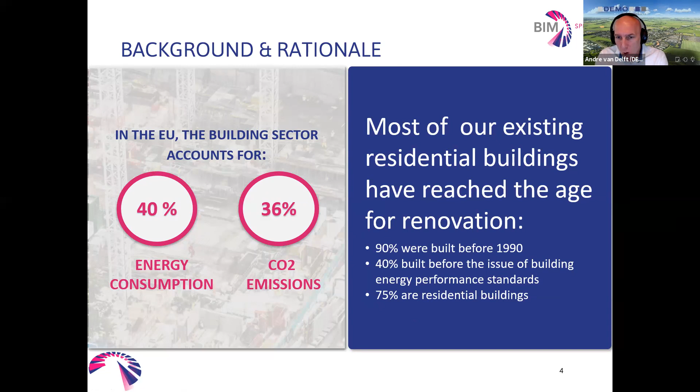And on top of that, 75% of the buildings are residential. So it is quite a challenge when you also realize that the renovation speed in general in Europe is between 1 or 2%. That would mean that renovating the entire stock would cost minimal 50 years and maximum 100 years. So that really is a long time to improve the buildings, and we badly need to do so, as we are all aware of.

So the objectives that we have set ourselves in the BIM-Speed project are firstly to enable all stakeholders to adopt BIM, to reduce the time of deep renovation projects by 30%. So that 50 to 100 years could really be sped up by this, and that's the first objective.

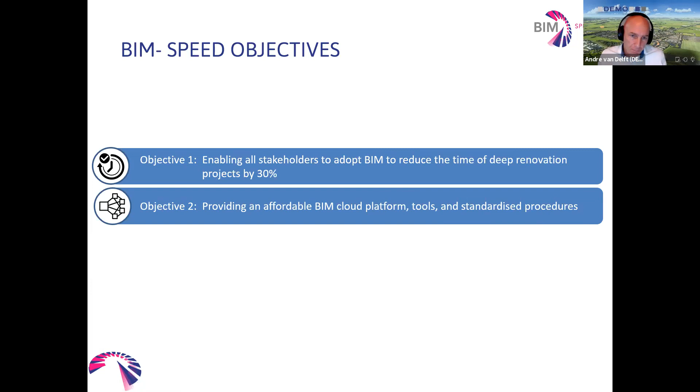The second one, in order to enable those stakeholders, we will provide, or we have provided already, an affordable BIM cloud platform, tools and standardized procedures. And last but not least, we want to create and implement renovation solutions with a guaranteed energy performance, because we can provide a platform, etc., but if there's no solution available that could be implemented, it would not achieve a result at all either, of course.

So these three objectives are integrated, you could say, in our vision, and the vision is again to develop and implement and provide this BIM-Speed platform. So a harmonized building information speedway for energy efficient renovation. And it is not so much only a platform with some dedicated tools, but we really want to create an ecosystem, not thinking and developing everything in advance.

Of course, there have to be tools developed in advance in order to use and make a valuable ecosystem, but we really are aiming for an open ecosystem, so that other suppliers, tool suppliers, can also link and provide their services and tools in this ecosystem. And in that sense, you could compare it with a real highway.

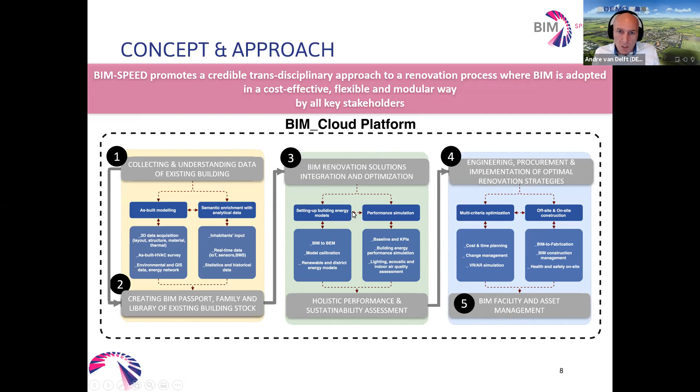You could wonder, well, is this useful for me? And what is it exactly about BIM? Well, BIM appears in many, many ways, and it can be used in many, many ways. So we made an inventory in this project as well about the possible use cases.

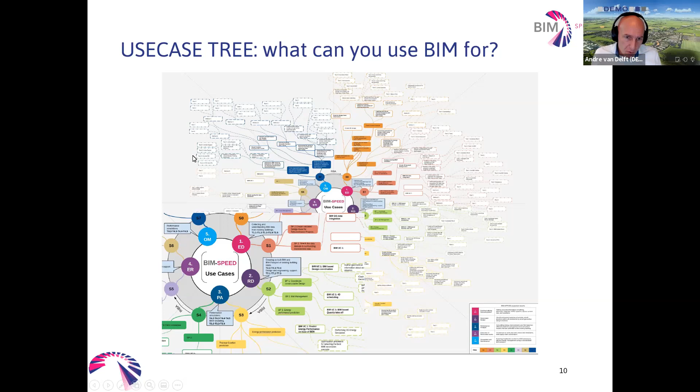And there's also a tool made available by the BIM-Speed project in order for yourself to assess: Is it valuable? Is there something that you could use it for? When there is this use case that could be applicable for you, then you could wonder, well, am I mature enough? Am I capable to drive on this highway, to use those tools?

There we have made a distinction about the BIM maturity for your company. So you can assess by using an online survey if your company, if your employees are already capable of using it in a fruitful way. And based on that, there will be some general suggestions to adjust your BIM readiness, so to improve your organization.

But at the same time, if your organization is ready for it, we still have to check if the particular project is ready to be used. Is it really helped by using BIM? So there is also a project questionnaire, the use cases, as I mentioned, and as well on this side, some suggestions to make it more mature.

And all in all, this is provided to really make it applicable and to make sure that you're getting the best out of it. If it is just in the old-fashioned way or really high-tech, it all can be used all together on the same platform.

When we think about really low-level entrance and really sophisticated systems, we have to make sure that different parties, different tools using the same highway can really cooperate with each other. So a lot of effort is put into the interoperability of all those tools, such as the industry foundation class and gbXML, mainly open standards, in order to make sure this ecosystem works with all those different tools, different users from different suppliers.

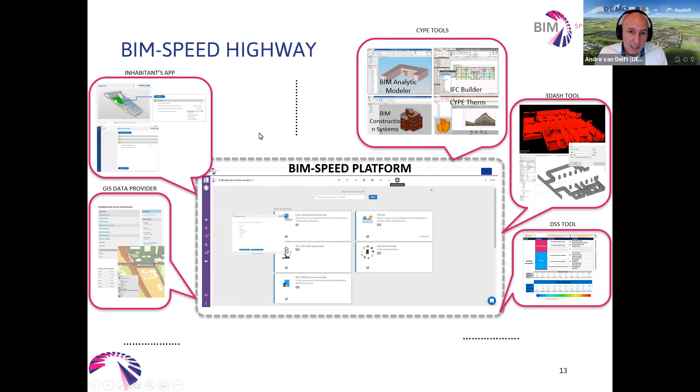For example, an app that can be used by inhabitants to collect all kinds of data valuable for deciding what kind of design we should come up with. Also GIS data provision of, let's say, climate data in order to make good energy analysis. All kinds of tools later explained in the session, like a decision support tool and a 3Dash tool. Just some examples, but again it will be explained more in detail later on.

And we are testing the possibilities of those tools, those protocols, on those demonstration cases. Not all functionalities are tested on every demonstration case, but we've made a nice distribution where, for example, we check in one demonstration case how we can acquire the as-built data and do the BIM modeling, while in others there's emphasis on the renovation design, or the building energy modeling and performance simulations, or the renovation execution, so offsite and onsite construction, and of course post-renovation evaluation and long-term maintenance planning. So all these functionalities, all these tools, are somehow being validated in these demonstration cases.

To conclude this general introduction of BIMSpeed, it is a 48-month project funded by the European Commission. At this moment we are almost at 75%, so we have milestones, 8 chunks of 6 months. At this moment we've more or less completed and validated the methods for renovation design and analysis, and we're about to enter the last year where the BIMSpeed competition is organized. That will also be explained by Spiridan this morning, and we really want to apply it all the way on those demonstration cases.

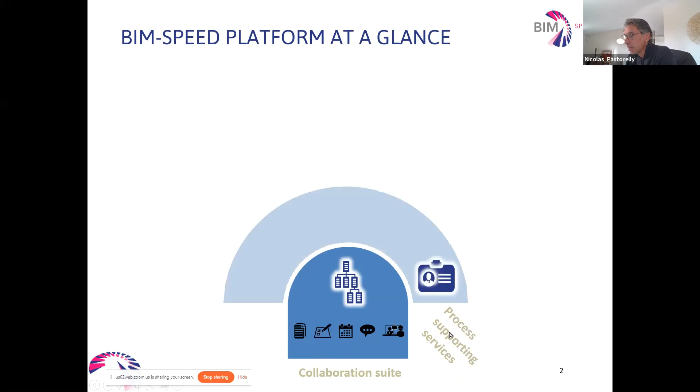On top of that, once you are manipulating files, you have some extra services like process supporting services. So you have a central authentication system, which is used by several of the services that are integrated.

You have a store of services where we can plug in the different services that you will be able to access through the platform. We also have a folder wizard, which makes it possible for you to create in your project some wizard according to specific folder organizations, and also to have some automation, like checking files or having specific content instantiated inside your project.

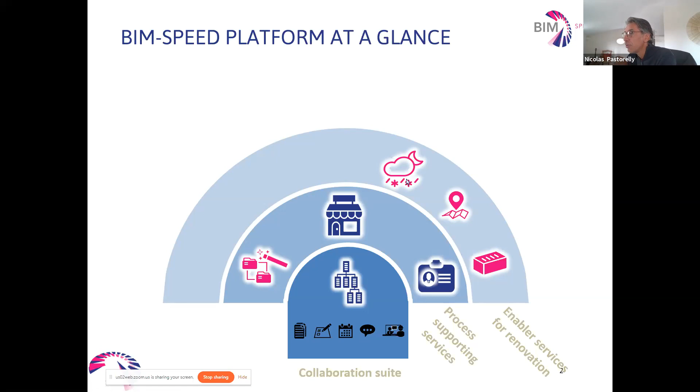On top of that, we have some enabler services for renovations which were created. We have a material service, which takes material data into the IFC and prepares it for simulation. We have a GIS service, for instance, where you can retrieve data around the location of your renovation site, as well as weather data, a system to retrieve all the data required to perform analysis and simulations before performing the renovation.

On top of that, you have all the BimSpeed partner services, several of which will be presented later in this presentation. You have the entire CYPE ecosystem. You have services which make it possible to get connected to IoT platforms and retrieve live information from sensors, some services which convert point clouds to BIM to IFC files and simulation tools, and things like that. Technically, all these tools are connected through a generic API, which is why we can have all these services and integrate more and more of them.

And we also have a competition. I will say a few words about that, but it will be described later again in this presentation.

I have to let you know that this platform, the BimSpeed platform, is actually built on top of the Kroqi platform, which is a French state-backed platform. It was created by the French state to help SMEs go to BIM and use BIM. BimSpeed is actually a superset of this platform, meaning that you need to create a Kroqi account and convert it to a BimSpeed account so that you can have all the services related to BimSpeed.

So let's talk now about the core services which are proposed by the collaboration suite. When you create an account, these are the services that you can use to conduct your project. First of all, you have a document management system where you can manage users and give rights on the folders to every user you want to involve in your project.

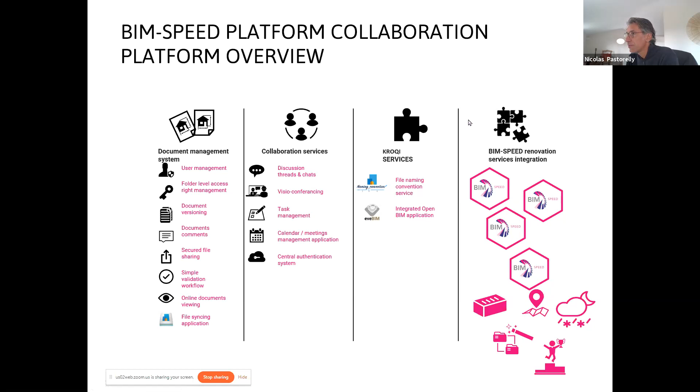All these services will be presented to you later, and you can find them, of course, on the Bimspeed website to have a concrete list of this.

Just a few words about the process of enrollment, and especially enrollment in the competition. If you want to use this platform, first of all, you need to create a KROQI user account. So you need to go to kroqi.fr, provide a login, provide a password that you can choose, and then create a personal account for a specific user.

Once you are there, you can create several workspaces. Usually people create a workspace with the name of a company, so mycompany.kroqi.fr or whatever you want. And once you are connected, logged in with your user account, and you are creating a workspace, you can create several projects, and on every project you can invite users.

So you invite people to create a login on the platform and to join a project, and you can share a document with them. At that point here, you are still inside the Kroqi platform.

And if you want to convert it very easily to the Bimspeed platform, actually what you can do is enroll in the Bimspeed competition. I will show you that later. You have a small service which makes it possible for you to enroll in a competition. And then once you enroll in a competition, your KROQI account is converted into a Bimspeed account.

So it means that you have a free plan for a competition. I mean, you can invite anyone, and you can store as many documents as you want. You have a Bimspeed branding of the application. It's not KROQI anymore, it's Bimspeed.

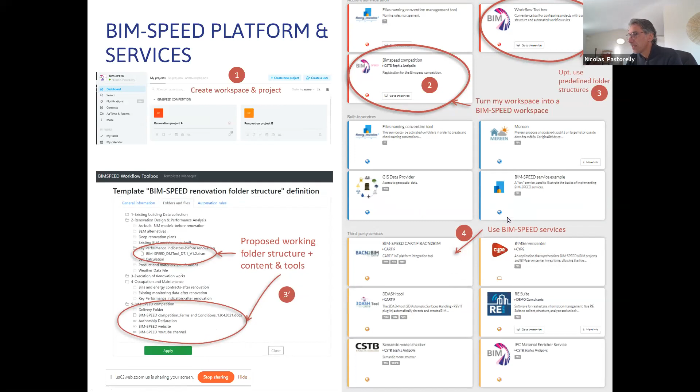Final word, our goal here is to break the monopoly of the construction industry, so you don't need to use a solution from one vendor. The vision of the platform is that we have several producers, several kinds of tools that will be presented to you. You are the consumers, and in the middle you can use the BIMSpeed platform to use several of these partner applications, all coordinated through the folders or through the platform to help you perform renovation.

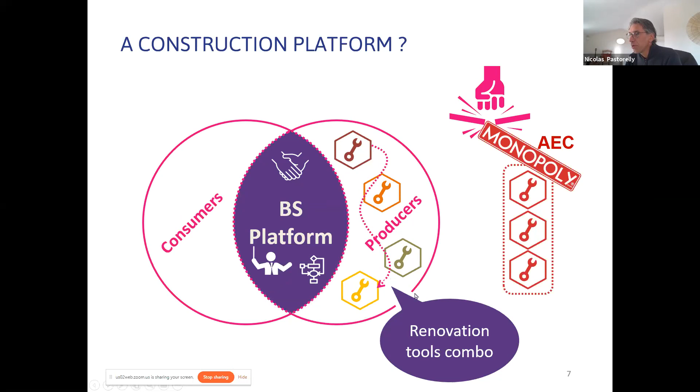And that's the toolbox, the combo which is proposed by the BIMSpeed platform. Okay, I'm done on my side. I hope it's good time-wise, and I will be available later for any questions.

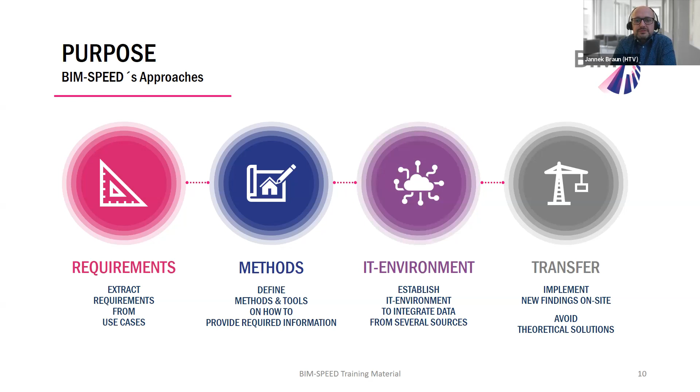Finally, as Andre mentioned earlier, we try to transfer the findings to on-site projects using 12 demonstration projects spread all over Europe. But what is the development, or how did we develop the BIM-Speed project?

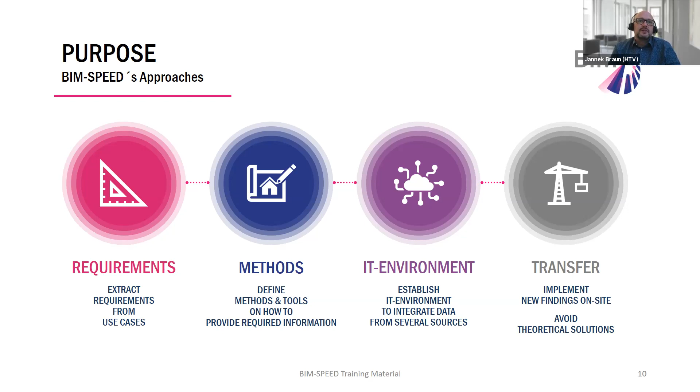Starting from the main objective, which I'll give in brief on the next page, we identify the relevant BIM use cases, and from those we can derive the requirements, or the data which has to be collected, to fulfill the use cases and therefore the main objectives.

So the four main objectives of the BIM-Speed project, as mentioned earlier, are to increase energy performance, to reduce costs, to speed up the whole refurbishment process, and to increase inhabitants' comfort.

When we started, we found it's a big issue to talk about use cases, because everybody has their own idea of what a use case is, but we found it most important to speak with the same tongue. So we created the use case terminology for our BIM-Speed project.

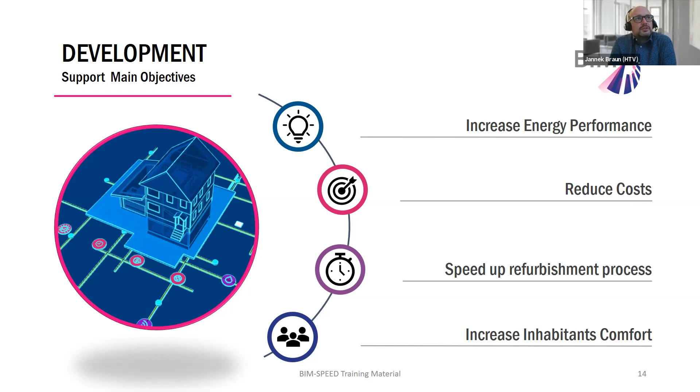To explain some buzzwords briefly: the renovation goal is the overall objective we would like to achieve, for example reducing energy consumption. The business processes are those processes done to reach those goals anyway, whether you use BIM or not - that's not important for that.

So the business processes are what we all do in our daily business when it comes to construction and refurbishment projects. The BIM use cases are use cases which support those renovation processes by using BIM models to get better and more exact results, supporting those business processes. Finally, the methods are the way of working to serve the BIM use cases.

So it's more specific when it comes to a specific software or service we are using. Bringing all this information together, the whole BIM-Speed consortium created a huge table with all the information, and I'll zoom into the headline to talk about it.

On the left-hand side you see the renovation goals which we would like to support: energy consumption, time reduction, cost reduction, and inhabitants' comfort.

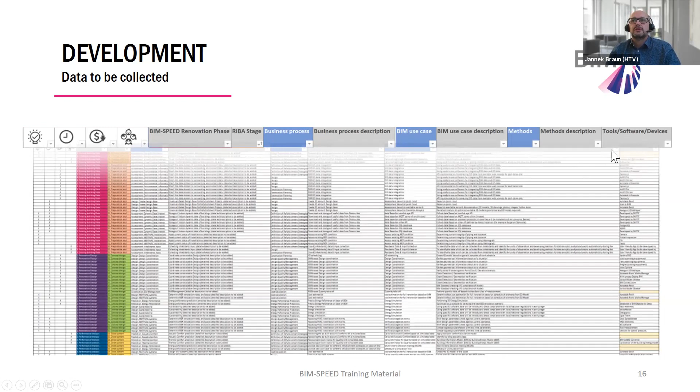So we're talking about a top-down approach where we define which goals we would like to achieve and go through the whole Excel spreadsheet to see which tools, software, and devices we can use to collect the information and support the specific BIM use cases.

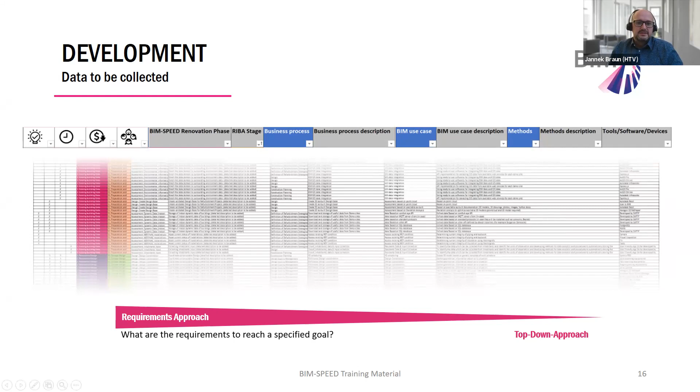So these are a lot of words. Maybe it's easier to just provide a short introduction, or a short overview, if I give an example of the BIM-Speed methodology toolkit.

As I mentioned before, the BIM-Speed methodology toolkit is an Excel spreadsheet meant to be used by anybody, and it's more or less self-explaining because we have a step-by-step introduction. All those buttons you see here are the filter sections we can go through.

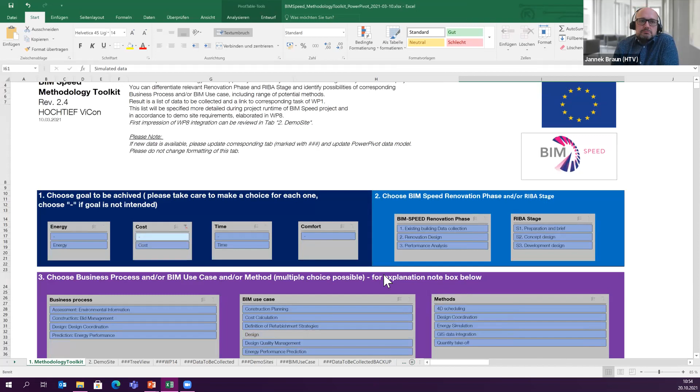So we choose for this example that we would like to reduce the costs, and we go for - in this example - okay, this is very good right at the moment.

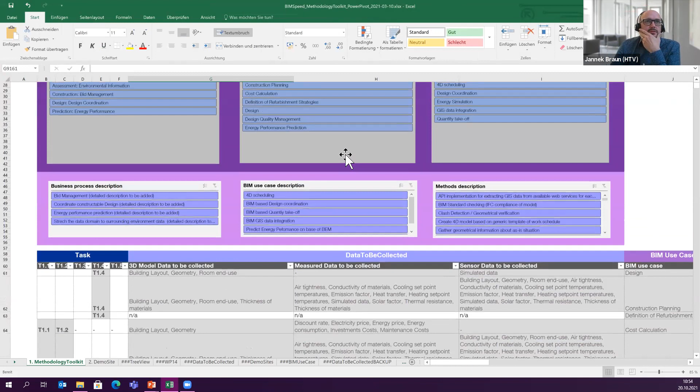Okay, and then you have the possibility to set, okay, we would like to go for the BIM use case construction planning. You will get more information on what is meant by the use case description, and finally it will be filtered down.

So as an excuse, this is not a problem of the spreadsheet of the BIM-Speed methodology toolkit, it's a problem with our docking station right at the moment. I'm very sorry for that.

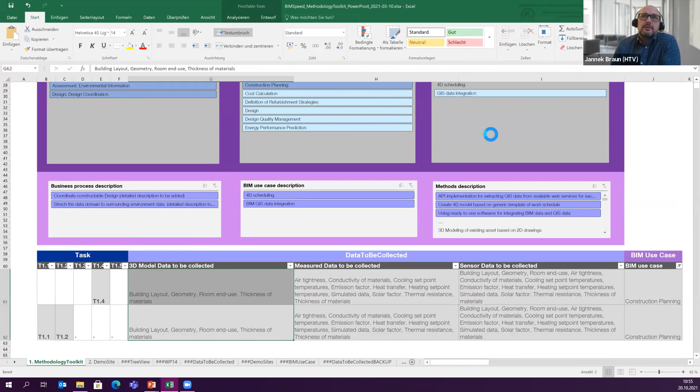But hopefully you see, okay, I have to set some filters, and finally I see which data needs to be collected on site. So on one hand, we have the 3D model data to be collected, which is just to set up the 3D model.

Measured data to be collected, which can be measured directly on site, and data which will be collected via sensors, which should be more or less automatically collected.

And finally, and that's the last step, is an overview. We see all the demonstration projects down here, and we also have the possibility to go for construction planning and see, okay, we would like to create a 4D model based on the generic template, and you will see on which demo sites this will be demonstrated.

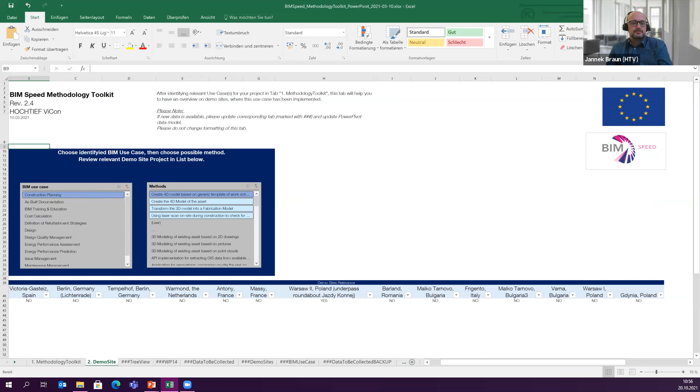To transfer the findings onto operational systems. And this ends my little struggling presentation, and hopefully I provided nevertheless a good overview about the BIM-Speed methodology toolkit and how we intend to identify which information has to be collected for specific BIM use cases. That's it from my side.

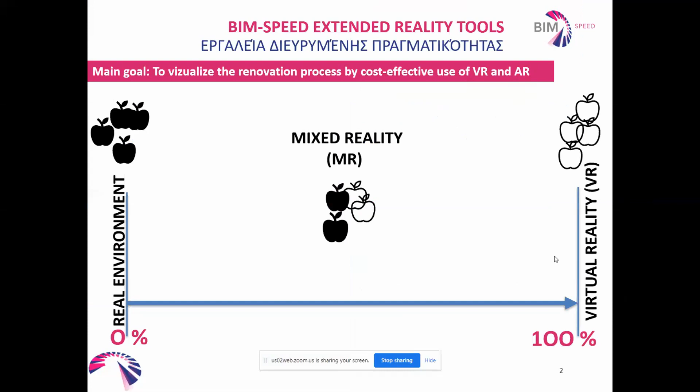You see the illustration that I created, 3 apples real and 1 unreal. I think this all is clear.

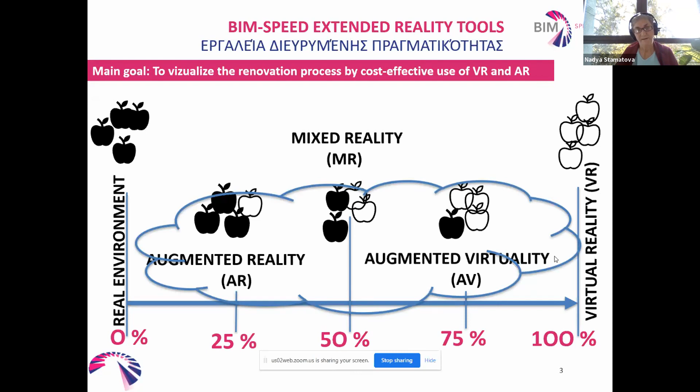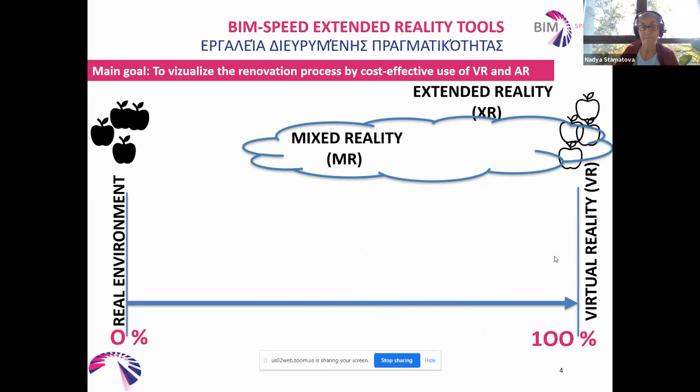What's extended reality? It's an umbrella term covering mixed reality and virtual reality. This is the full picture.

Before preparing the application, each one application, you should have an idea what you show. So you should write a scenario of the application, and it's a part of the game design document.

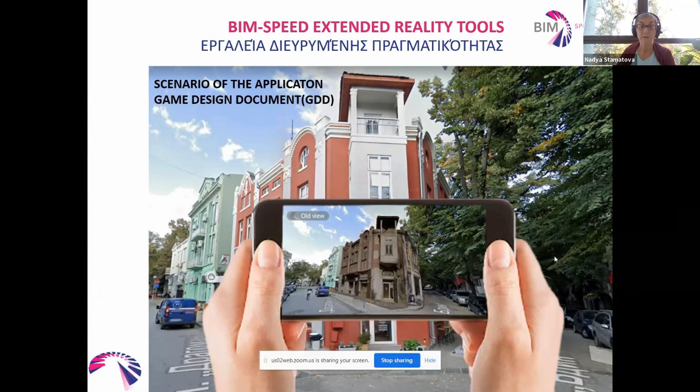This is a part of the game design document, and here another idea. It's not real, and now you see the real test.

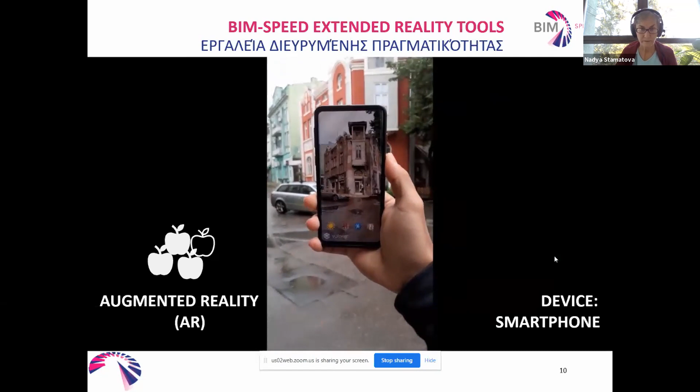It is a mobile augmented reality. The device is Samsung A20.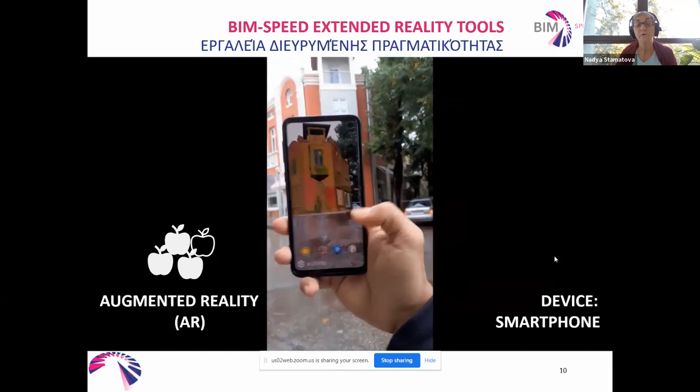If you use any device, if you prepare to produce an application, you should know that not all the devices support augmented reality. So you should check, there is a list on Google for which devices support augmented reality and which do not.

Firstly, it needed to be recognized at the building. It is not easy. Exactly this application uses Vuforia.

We have prepared a set of training videos where we explain in detail how to produce the applications. All our applications were produced with Unity.

It could be produced with the Unreal Engine. So these are the two engines for games, but we had reasons to work with Unity. All this, I repeat, can be found in the training videos.

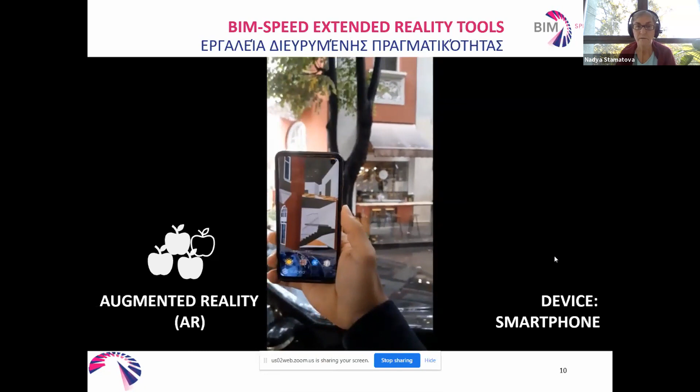Now they are uploaded on the site of BIM-SPEED, also on the YouTube channel of BIM-SPEED, and also on our YouTube channel, the channel of Architectural Spice Ltd. And there are links also from our internet site, Architectural Spice.com.

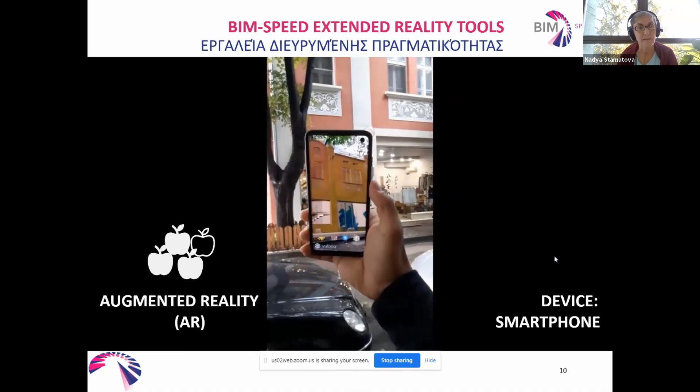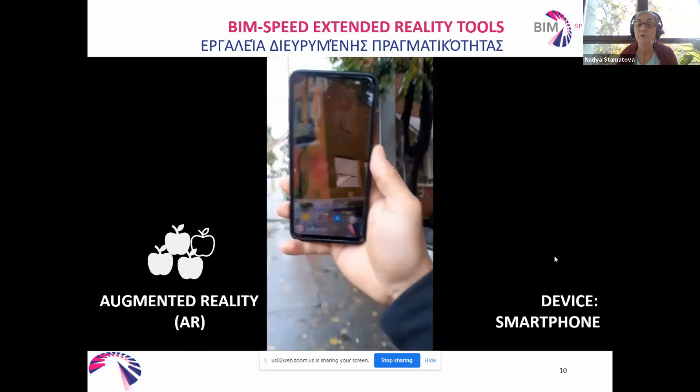Now, in this moment, you see the volumetrized thermal scans. Thermal scans are two-dimensional. Our colleague Antoni had the idea to prepare a 3D model from the two-dimensional scan. Now he is working on this.

Our colleague Chris demonstrates the application. You see now on the screen the old building, how it was before the reconstruction.

This is the most powerful device, Microsoft HoloLens. You'll see this is mixed reality.

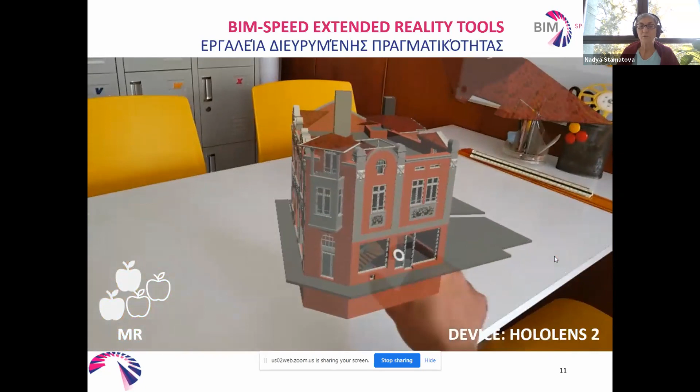Specialists say mixed reality covers everything from real to virtual, but recently the specialists say the most complex is in the middle. In the middle, half is real, half is unreal, and also it has occlusion. This is a specific term.

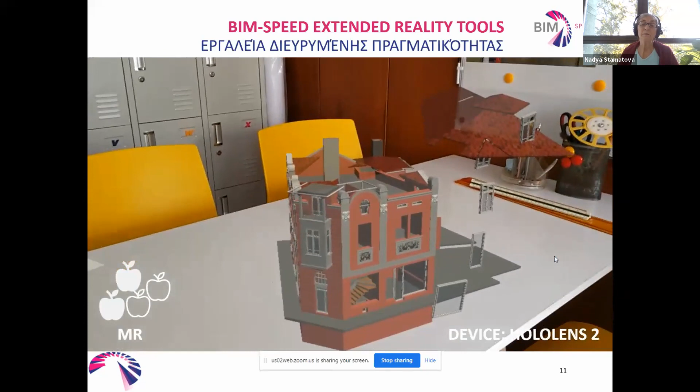If somebody is interested, he can write to us. I would say it's quite complex.

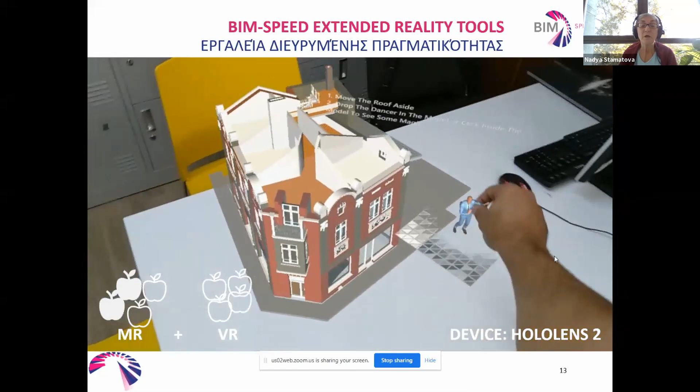Here is something very interesting, again with HoloLens 2, mixed reality, the same model. And after that, you'll see a scale 1:1. So now, imagine you are this person.

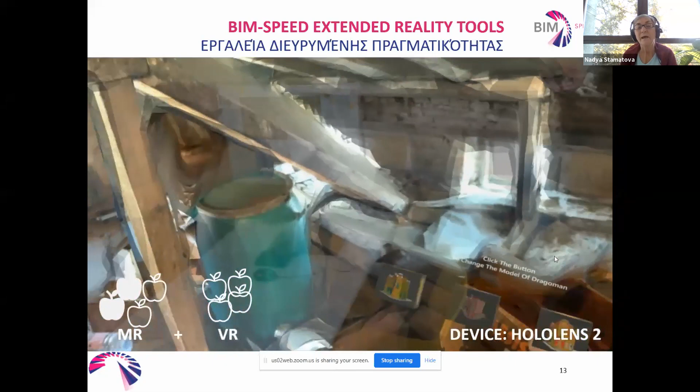So this is virtual reality that appears in the studio, in our studio. Instead of the real walls, the real ceiling of the studio, you see the attic floor of the demonstration site.

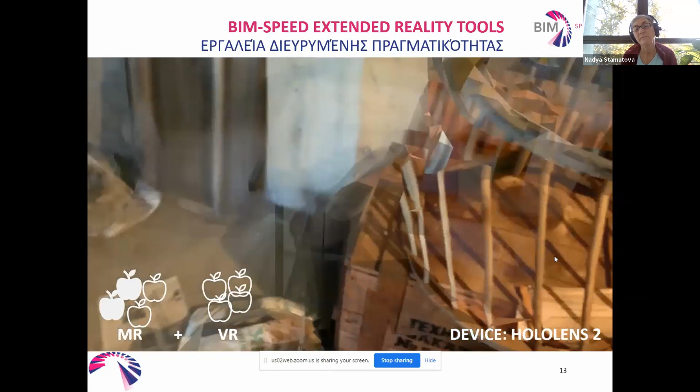This is a building, cultural heritage, at address 28 Dragoman Street in Varna.

This is the simple, very cheap way of augmented reality, but you should have it appear at the front of your desktop.

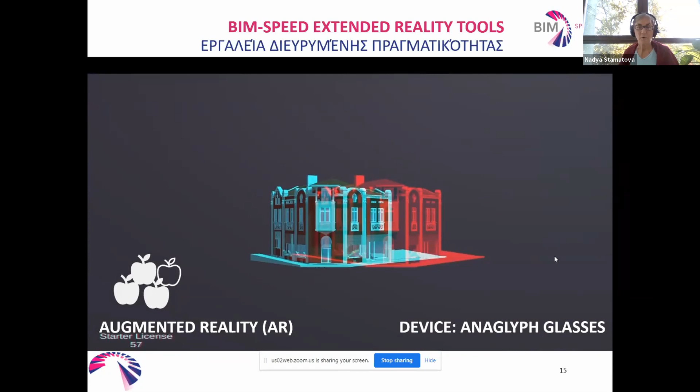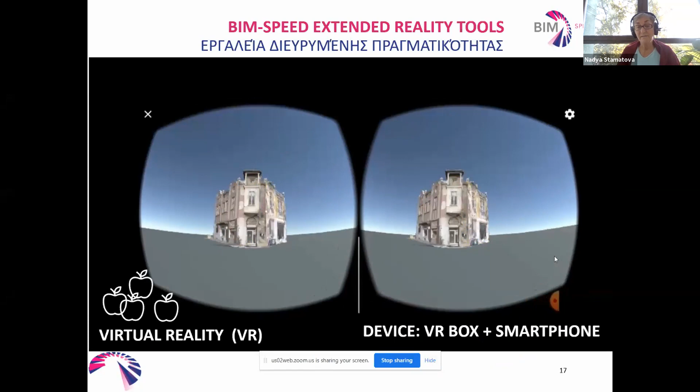Here is explained the virtual box. This is the test of the virtual box. So you see the left eye and right eye see a little different, and from this the brain receives signals for 3D visualization.

So this is the BIM model. Now you see climbing to the stairs, and now the stairs will lead us to the same attic floor on the building at Dragoman Street.

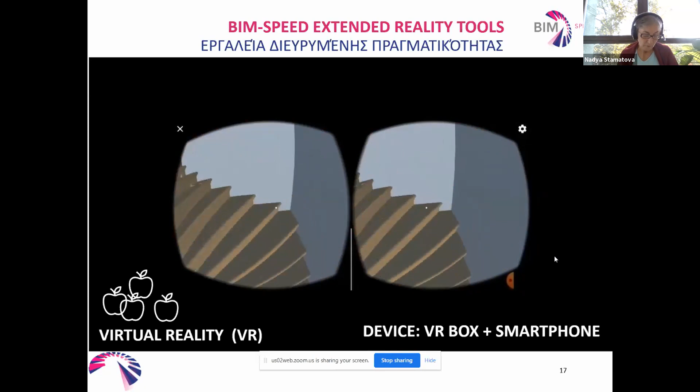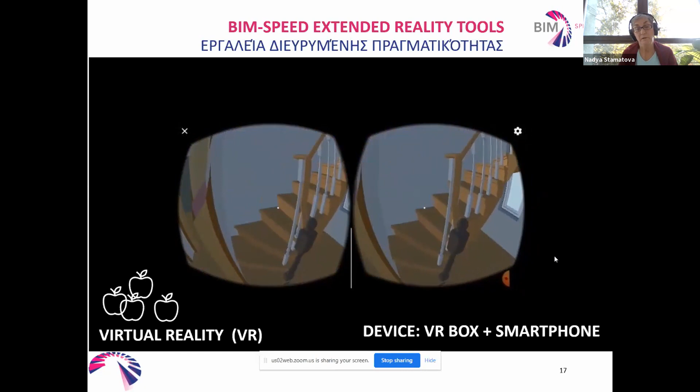I would say that this is very hard to work with the VR box, although the boxes are very cheap, but there are not these functions that you can have with Microsoft HoloLens. For example, we had to write a script for controlling it.

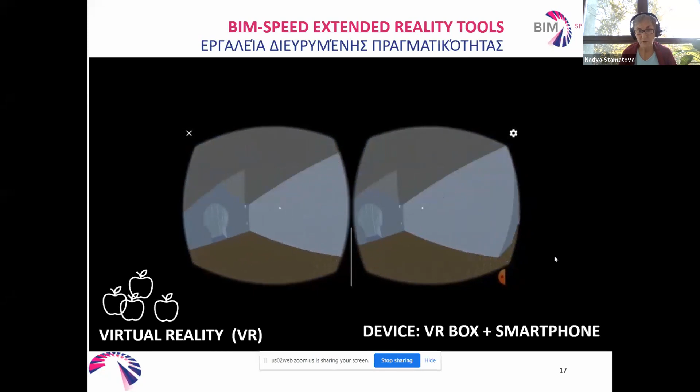For example, if you look some seconds in one direction, the model changes. This way you can see the first variant, the second variant, the third variant. So now the model changes. This is photogrammetry.

It was done by our colleague Antoni with an iPhone 12 Pro. But it could be done with whatever pictures from whatever camera, after passing through any of the softwares for photogrammetry.

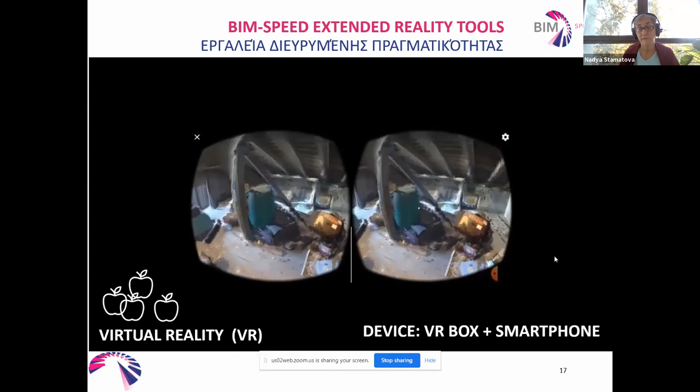Once again, I say working exactly with a VR box is not easy. The VR box is also, this is the technology for Google Cardboard.

And this is the last demo that I will show you. Now you see it is two-dimensional, but this is with a headset. This is with Oculus Quest 2.

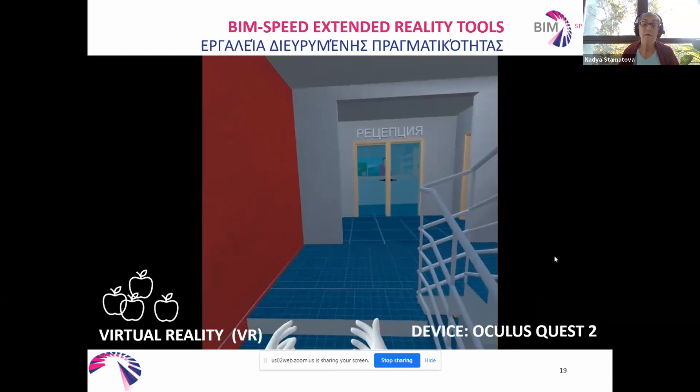This is the building. It's a municipal dormitory in the town of Malko Tarnovo. It is a small municipality at the boundary with Turkey, very near, so on the road from Burgas to Istanbul.

So it is the BIM model. We would like it to have more details, but it is very heavy.

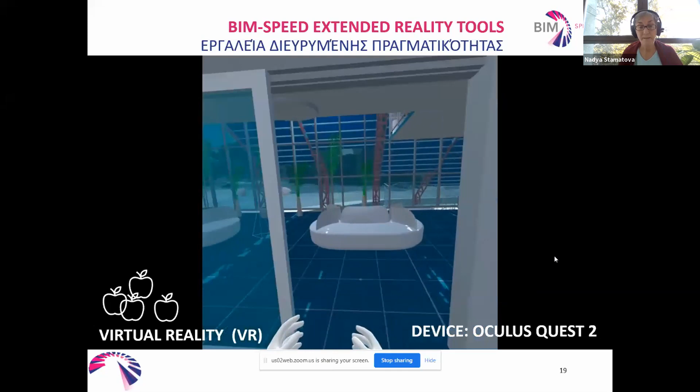So these are the problems. So when you are with the headset, you can turn your head around and look up. You see here the terrace. We glassed this terrace, creating this so-called sun space.

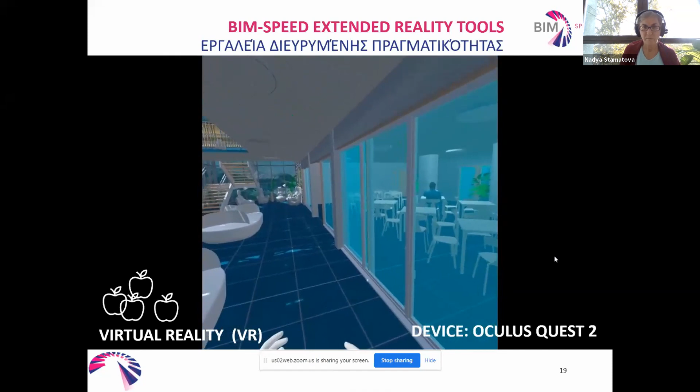You see how we changed the model, how it was, and how we offered it to be done. This balcony, the stairs lead to the second floor.

This balcony is a new one. So here, in this space, it helps for the heating of the building.

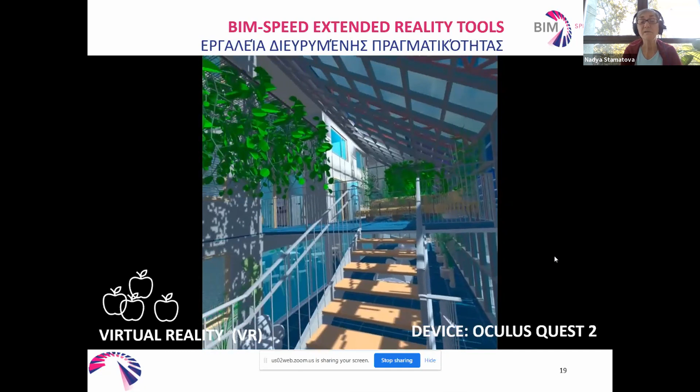Now they heat the building with wood. So we offer there, this sun glass collects energy. Also, there are photovoltaics.

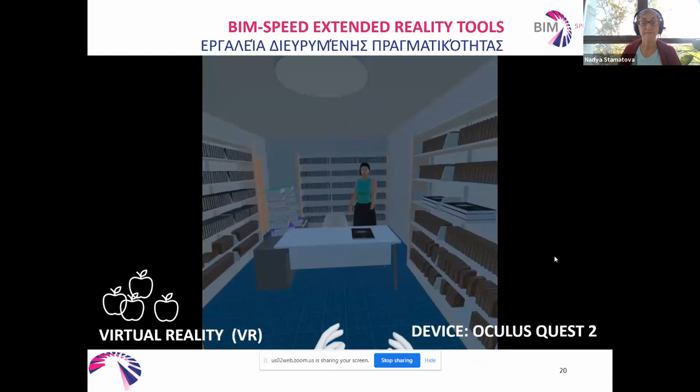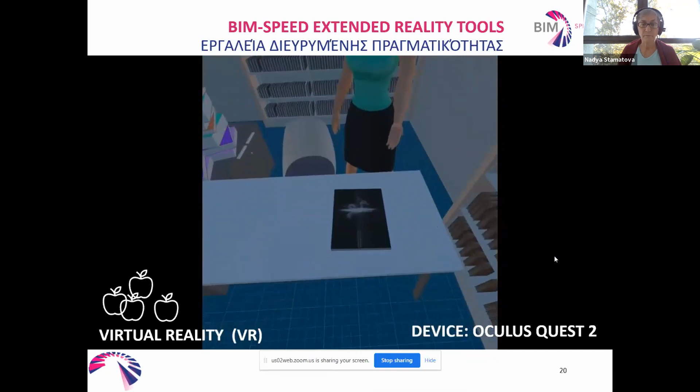Here we offer in these rooms to make a small room with computers, to move the library from another place. On this dormitory, one of the floors is for high school students, another one is for workers, and another one is a hotel for when people come from Sofia on business trips.

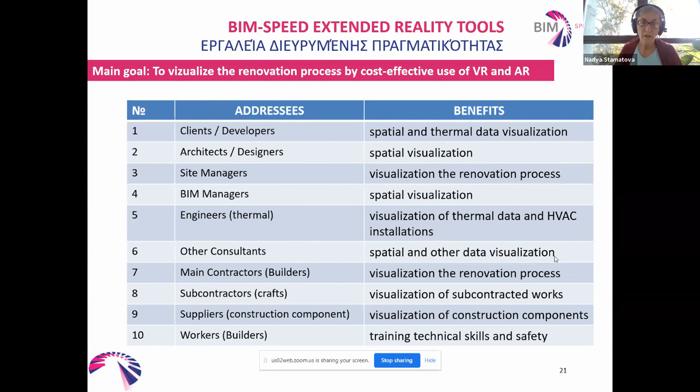So it's a short listing for what could be used for virtual reality and augmented reality. And if somebody has questions, he could write to us.

Also, once again, I say that we have a set of video tutorials for augmented reality, for virtual reality, for volumetrization of thermal scans, and we are working on preparing a tutorial about producing models by photogrammetry. This is all the presentation.

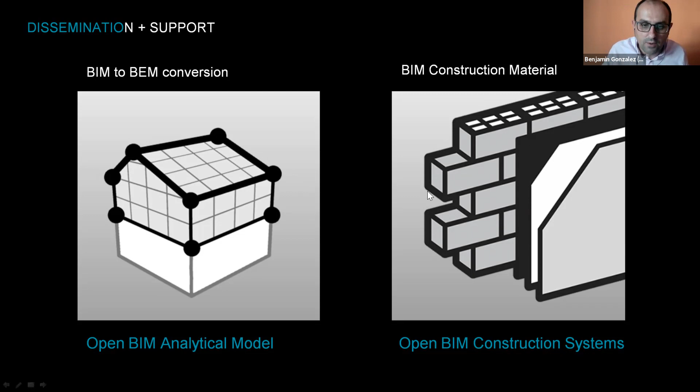These two utilities, the challenge and goal for these new utilities, is to improve and create an algorithm to reduce the gap that we have between the two models, to generate automatic joint generation. This is important because thermal bridges are one of the most important losses in buildings nowadays, and we need to calculate these joints.

In order to calculate thermal bridges, this is an important point, and with this tool and the 3D model we will be able to generate these joints that will become thermal bridges, depending on the type of space we are working on. We will generate the analytical model perfectly to calculate the energy and acoustic analysis.

It's important to preserve the automatic calculation, so if we calculate something and change the 3D model, it's important to get this new information and recalculate. Finally, it's important to have the database, the construction database, ready for any energy tool, in this case with Energy Plus and CTE HE+.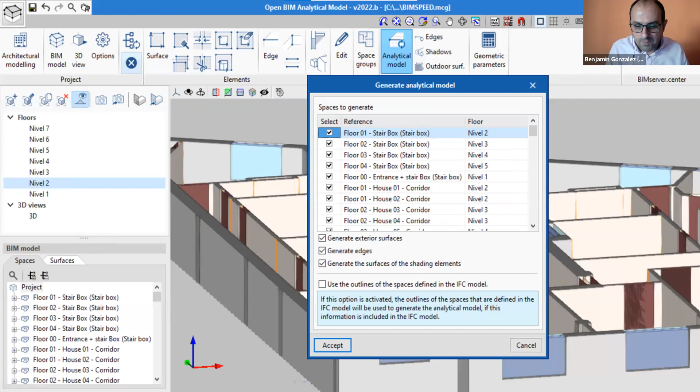So we fix a problem I explained before. This is one of the things we will see afterwards, just an example. We can see when we have different rooms and different parts, it's necessary to take into account the different edges, for example this one, to calculate the thermal bridges. If you don't calculate with this analytical model, you need to put this information manually, and this is catastrophic. You know very well, if you are energy engineers, I'm sure you are suffering these kinds of things.

Just to let you know, this is a free tool to connect, via IFC, the architectural model with the thermal model. So if you want, you can download the tool. This is the construction OpenBIM tool, the construction system, OpenBIM construction systems, and it works with the 3D model.

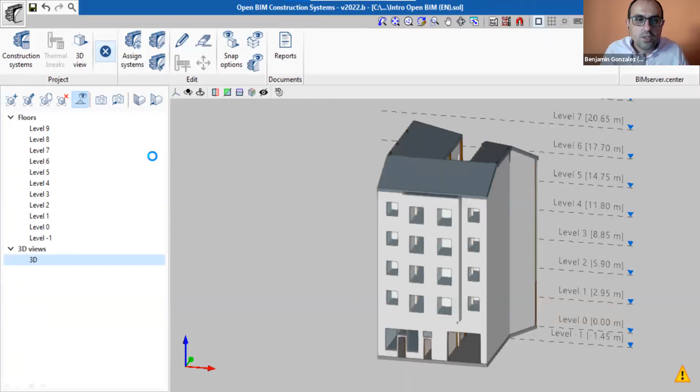Whatever 3D model we have, it doesn't matter, we will be able to generate the construction systems and the different energy or acoustic simulations to calculate things like the construction characteristics and the different reports that we need. This is the geometrical part, but we will also be able to put the different thermal analysis needed to calculate, in this case, with CYPETherm EPlus. So this is important to generate if we are ready.

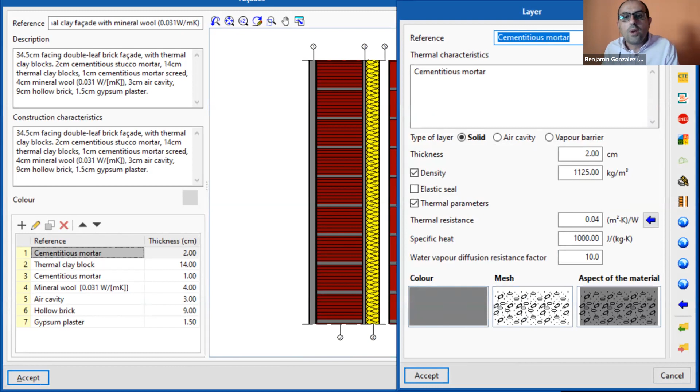If we don't have it, it doesn't matter, we can take this information in CYPETherm E Plus as well. With CYPETherm E Plus and CYPETherm Improvements, we have talked about the analytical model, the construction systems, and now we are talking about a tool to calculate the energy simulation.

This energy simulation is with CYPETherm E Plus, and it helps generate the different measures that we want to compare for the improvements we want to do, and this is through CYPETherm Improvements Plus. So this is just an overview of CYPETherm E Plus, and you can download the new version as well.

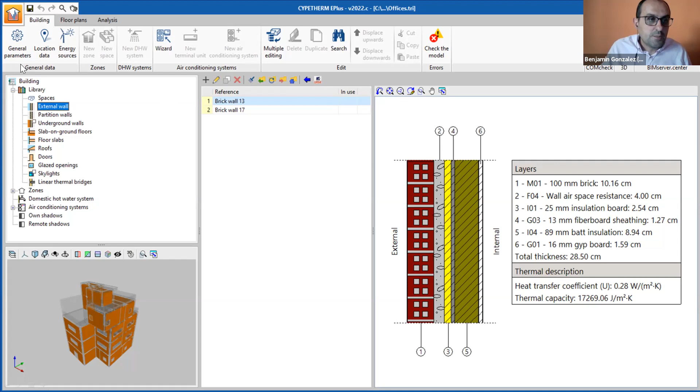It works via this 3D model, which could be from the architectural model, but the best way is from the analytical model. We will be able to generate the constructions, the wall we can get from the construction, the OpenBIM construction systems, or we can generate the model here if we want to. So this is the aspect, it's quite simple, but the key part is we can generate here, for example, the thermal data, the weather data, however we want.

It's absolutely open for any weather data file, so you can get it and put it here. You can view the model in 3D or 2D as well. Maybe we are more comfortable working with the 2D model, and it's possible to do it and generate the different drawings for the thermal model.

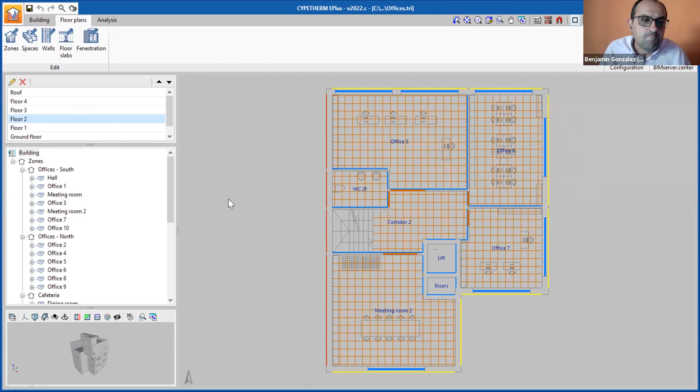It depends on the country. There are many countries where it's mandatory to generate this kind of output for the thermal analysis. It's up to you if in Greece you want to generate it or not, but it's possible to do it.

And finally, an analysis for the different demand, consumption, anything that you need. For example, you can calculate here with this tool, if you don't put an HVAC system, you will be able to calculate the different temperatures you will have for the whole year.

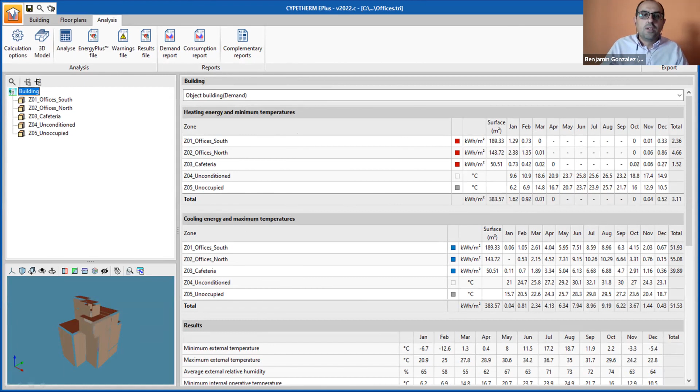And you will be able, for example, to see if it's more than 28 degrees and maybe you need to put HVAC systems or whatever. So it's important to assess the current situation of the building and the different measures and improvements that we want to do. For any measure, for any hypothesis, we will be able to connect with the improvements we have here, the improvement measures, with one click.

And we will go with this tool, CYPETherm Improvements Plus, where we will be able to get all the cases that we calculate with CYPETherm E Plus. We will be able to create the different hypotheses, the different measures, analysis, and to compare. We will be able to compare the different measures in order to select the best one, of course.

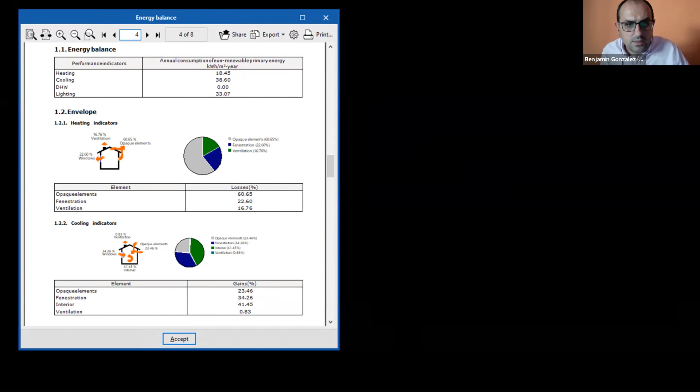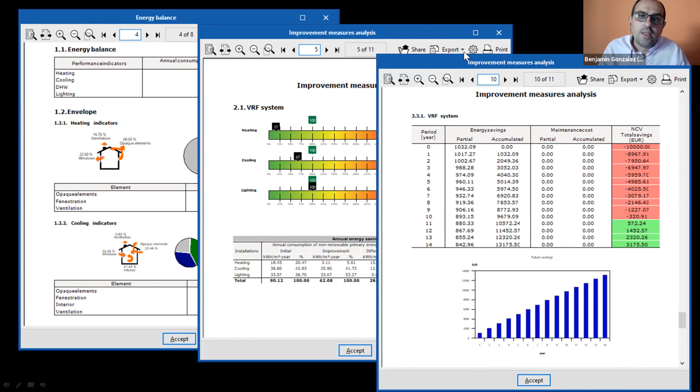So here we have some examples for energy balance to make it easier, the improvement measures, and the improvement measures analysis from a monetary point of view. This is important because you will be able to see the different measures that you want to do, and I think it's important. So I don't know if we'll have time just to show.

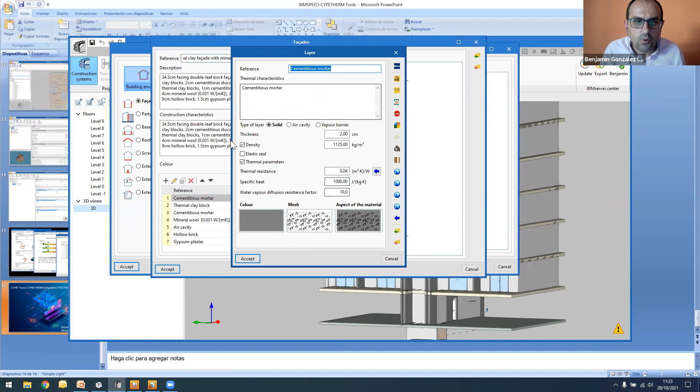Just to show you, we have CYPETHERM EPlus, and this is just to see, it's important to know that you have here the thermal bridges, and it's important to take into account these edges through the analytical model. For plans, the same, you can take it here, all the analysis.

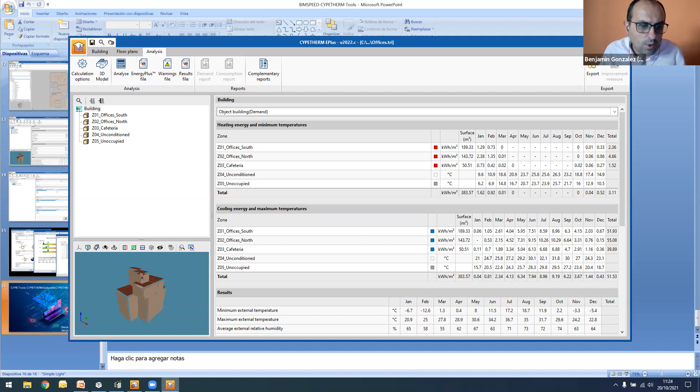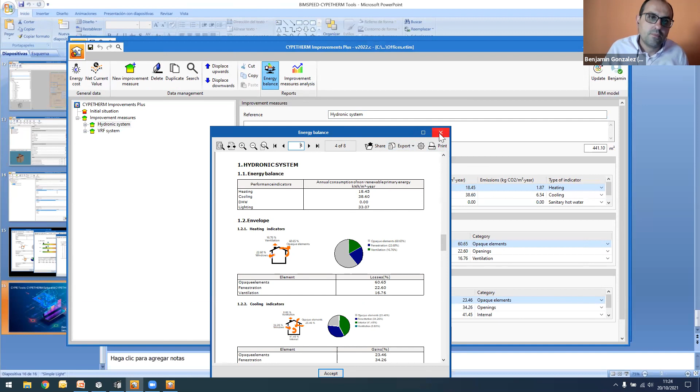And finally, we have the CYPETHERM Improvements Plus, where we can detect, and we have the different balance that we talked about before. We can analyze the different measures and take the right decision. Okay, so this is all from my side. If you have any question, I will be very glad to answer if I can.

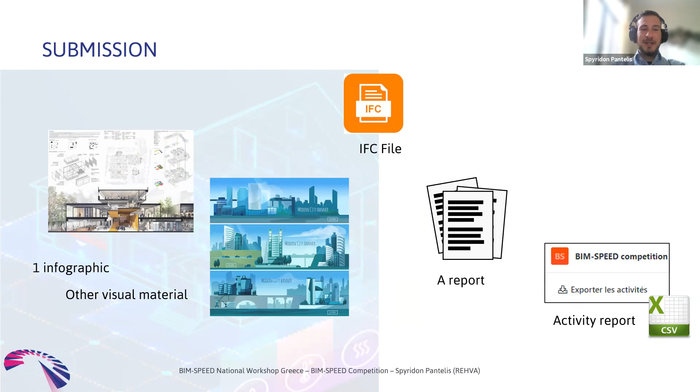So, assuming that you have registered your team and worked during this period, when it comes to submission, here is what you have to submit for your project: one infographic and other visual material of your design project, the final IFC file, a report - you can find the template of the report on the website, all the information is there as I mentioned before - and an activity report, which can be downloaded in one minute from your collaborative space on BIM-SPEED. So that's all for the submission.

Coming to the awards: some are the same for professionals and students, and some are separate. First of all, both professionals and students on the winning teams will have EU-wide exposure through the BIM-SPEED dissemination channels. This means the umbrella associations, universities, and companies of BIM-SPEED will share through their social media and other communication channels about the winner and the winning team. I think this is a very good opportunity - just to mention that REHVA, my organization, can reach out to 120,000 HVAC engineers, and this is the same case with FIEC, ACE, and EDC.

So I think this is a very good promotion for your company, or if you're a student. Secondly, both professionals and students will have the opportunity to present the project in front of the member organizations of the Architects Council of Europe, and also present or participate in one of the major EU events like European Sustainable Energy Week 2022, Sustainable Places, and maybe other EU level conferences as well.